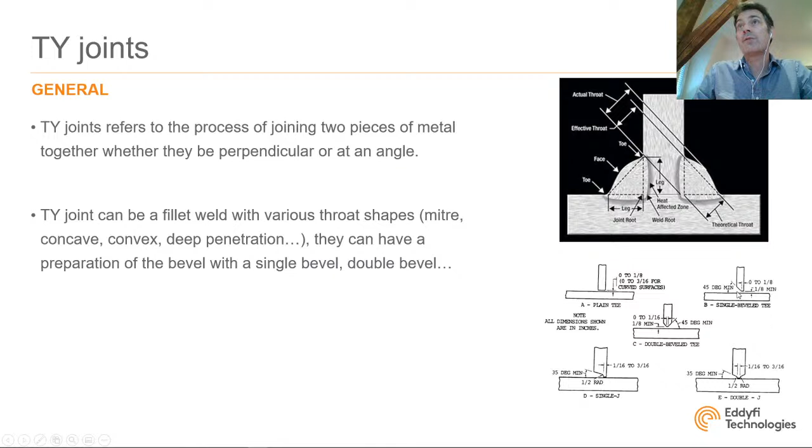And you have a big variety of shapes. You can have a plain T, meaning without a preparation, so we'll have one example of that. You can also have a single bevel, double bevel, or other type of preparation. If you look at the international standards, ISO, ASME, and others, they provide guidelines on how to inspect this type of welds with conventional UT or phased array. Today we will be focusing mainly on phased array.

So ideally, to inspect a T joint, here's the T, here is the base plate. The best location is actually on the plate opposite the web, here, because you have direct access to the two welds, and you can just do a regular linear scan, or if you do conventional, just use a regular L0 probe to inspect this fusion face right here. You can complement that with two sectoral scans to be normal to the other fusion face when you have a prep.

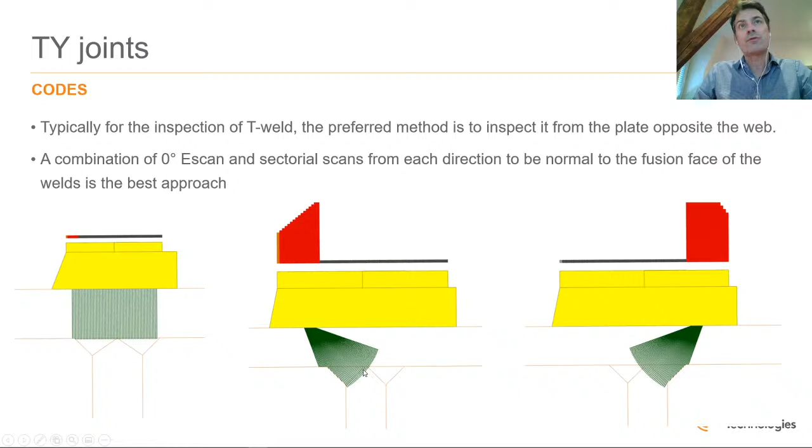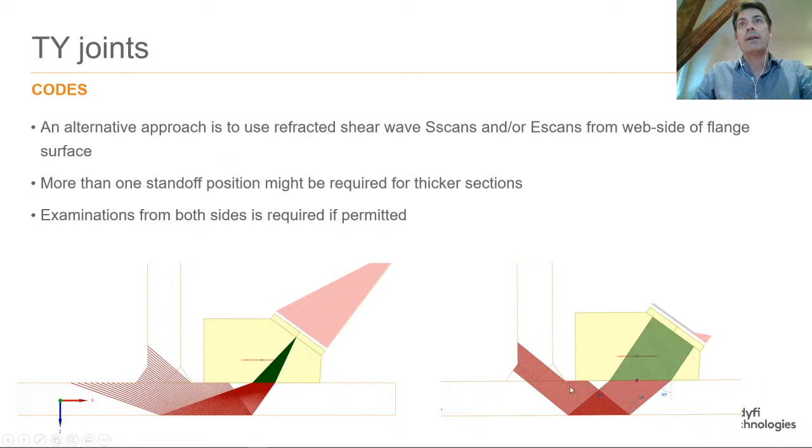Sometimes you don't have access to that surface, so as alternative approaches, you can put the probe on the flange surface and perform a sectoral scan and/or a linear scan. Of course, you have to do a scan plan and show that you are doing full coverage of the weld or welds, and as much as possible that you are normal to the bevels.

You can also inspect from the T, and that's the same. You have to do a scan plan to show that you are covering your weld. So here with the high angles, you can inspect this bevel, and with the low angle after rebound, you can inspect this bevel with either a sectoral scan or linear scan.

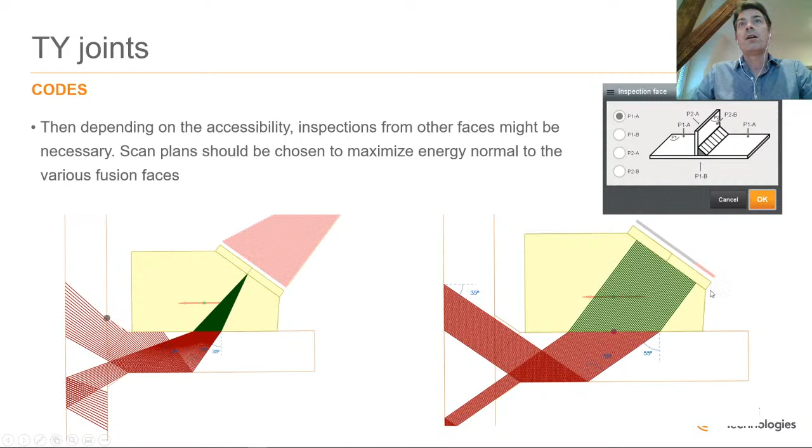So for my demo today, I will be using two blocks. One is a T, or what's left of it, with a very thick base plate of 40 millimeters and a T of 12.5 millimeters. There is no prep, so there is no fusion between the T and the base plate. It has two fillet welds. And actually, that sample has some fatigue cracks right here, and that's why they cut it.

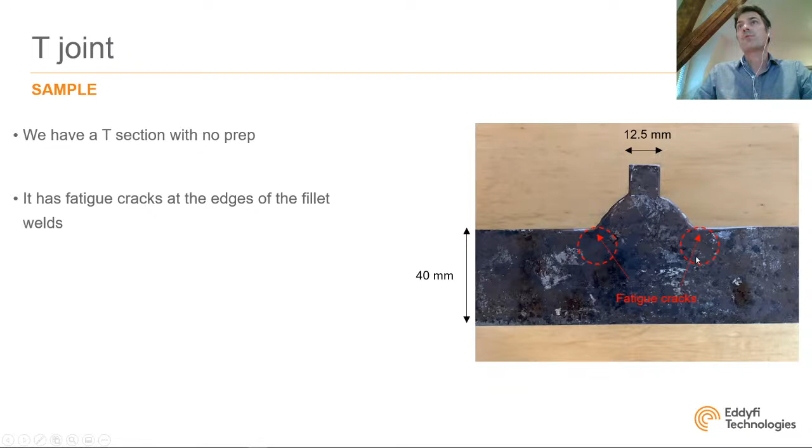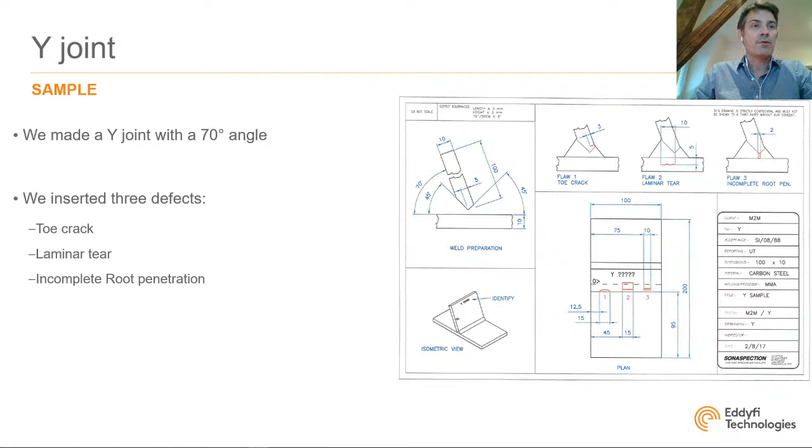My second sample is a Y joint that was made by our friends from Sonaspection. We asked them to put in three defects. So there is a toe crack right here, a lamellar tear, and an incomplete root penetration. Okay, so now let's go into the demo.

So here I'm sharing my webcam, and you can see the sample that I will be using first. And here I'm connected to my Gekko through Wi-Fi, and you can see the screen of my Gekko right here. So the first example is the T section, the one I was showing at the beginning, and I'm going to show how to define that component in Capture. First I imported a picture of it. You can simply import pictures by clicking here.

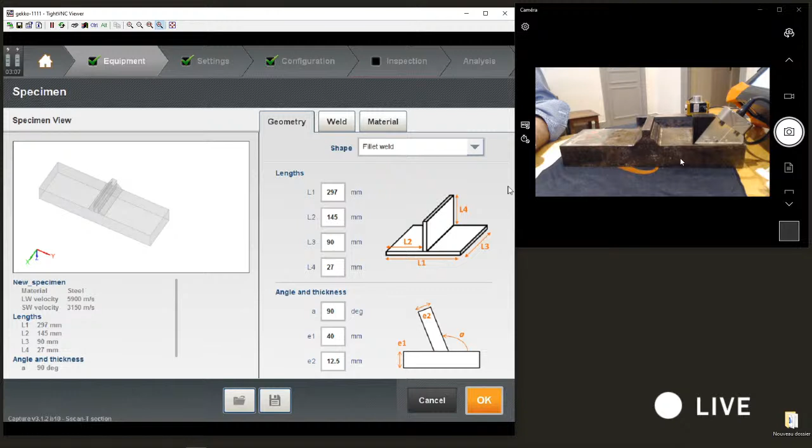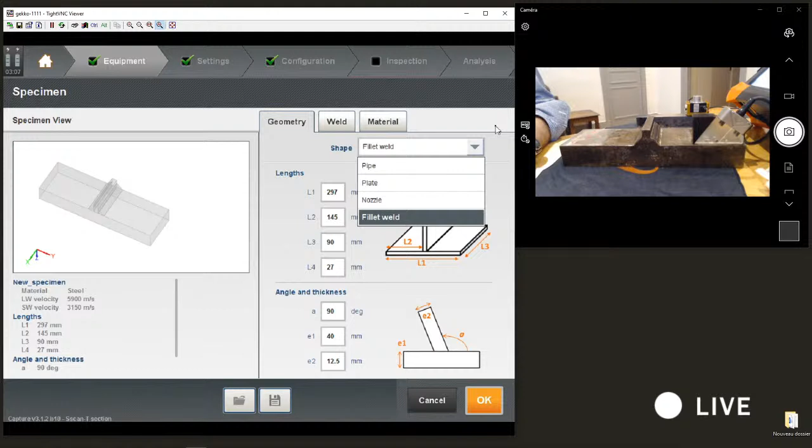So in Capture, you can see here the 3D of my component. At the moment, we can handle 4 different parts. We can do plates, pipes, nozzles, which will be covered, I think, next week by my colleague Dean Mason in another coffee break, and fillet welds. We can also import 2D CAD files as overlays. We'll talk about that in another coffee break as well.

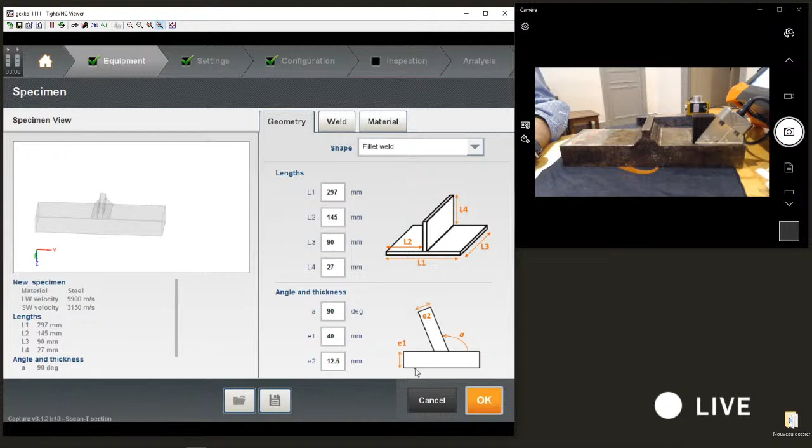So the fillet weld is actually pretty easy to define. This is a parametric definition. You have a drawing here with all the different lengths, and you just have to input all the values. And here for the angle and thicknesses, the thickness of the base plate is 40 millimeters, and the thickness of the T is 12.5 millimeters. We have a 90-degree one.

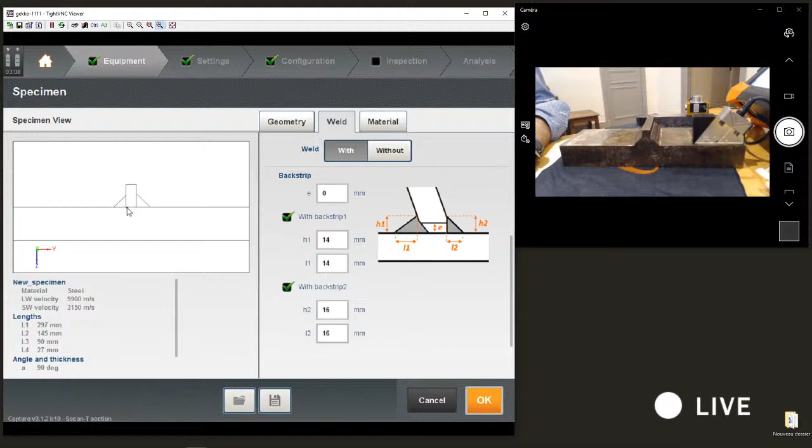Then you can define the weld. So here we don't have any prep, so I'm not using any chamfers right now. I will show that later with the Y joint. So the only thing we have to define are what we call the back strip, or they're also called legs, which is basically that length and that length. So I can remove them, for example, if I have a fillet weld on only one side, or I can add them, and I'm just going to adjust the length.

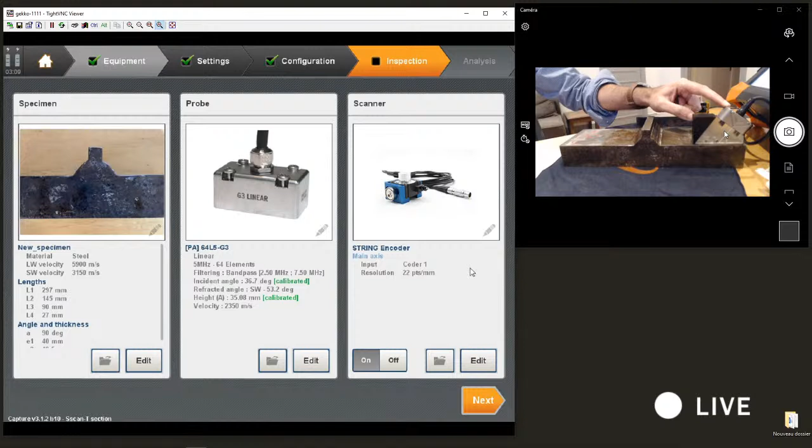Okay. This is just carbon steel, so I'm just going to use carbon steel. For the probe, I'm just going to use a regular 64 element 5 MHz G3, which is a 0.6 millimeter pitch, very typical for 5 meg. I'm going to use a shear 55 wedge. You can see that it's already calibrated, but for those who haven't seen the calibration, I'm just going to do it. It's under reference, angle and height calibration.

So what we are doing right now, we are firing all the elements one by one. So this is element 1, this is element 64, and what you are seeing right here is the back wall. As I move, you can see the back of my wedge. So I just have to adjust my gate right here to make sure I see all the back wall. Press measure, and you can see a white line right here. So that's a linear fit to measure the angle of the wedge and the height of the wedge. So this is the wedge delay calibration. You don't have to do anything else.

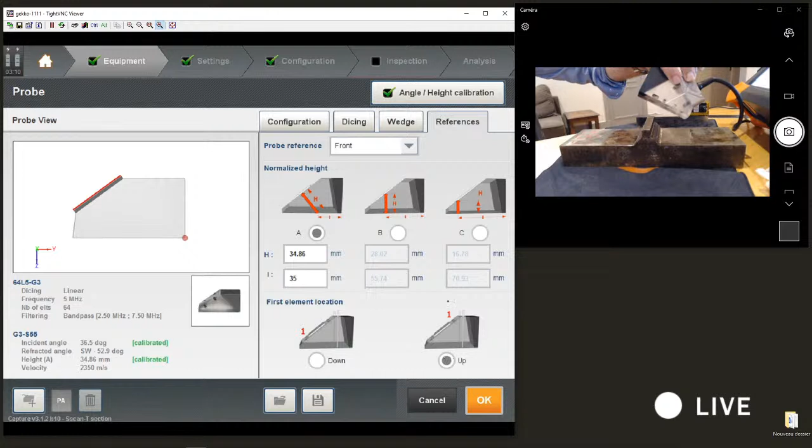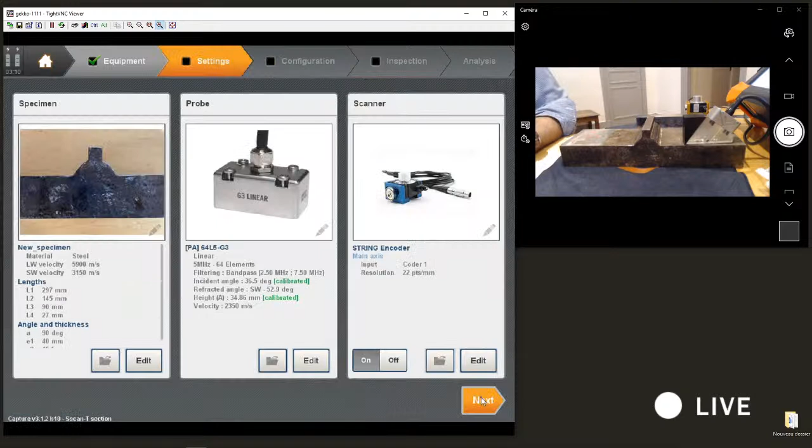Here you can see that my first element is positioned right here. It's down, but the system also checks automatically if you misposition the element. So let's say I'm going to tell him my first element is up. If I redo my calibration, you can see here that it's putting back my first element at the right location. Okay. I'm going to use a wire encoder, a string encoder right here.

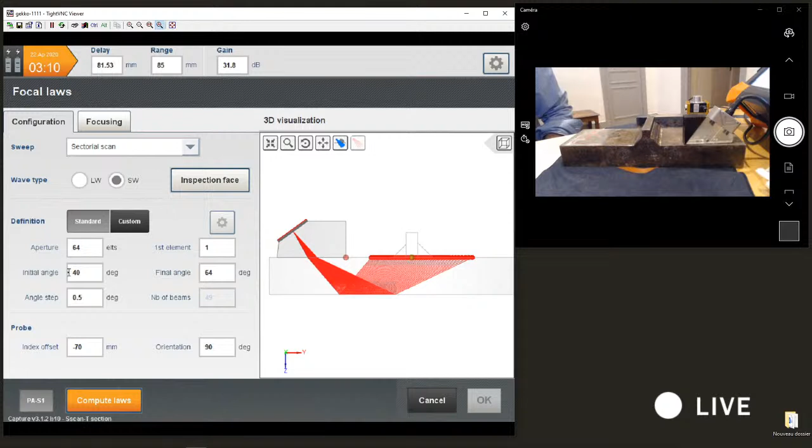Okay, so let's go to the delay laws now. We are going to put the probe where it's located right now, on that surface. And here we're going to use a full 64 element, and we are going to do a sectoral scan. Using the wheel of the screen, I can adjust. I use 0.5 degree. I can adjust here the coverage. So I just want to make sure I'm fully covering my weld. So the low angle after reflection, I'm going to inspect that side, and the high angle right here.

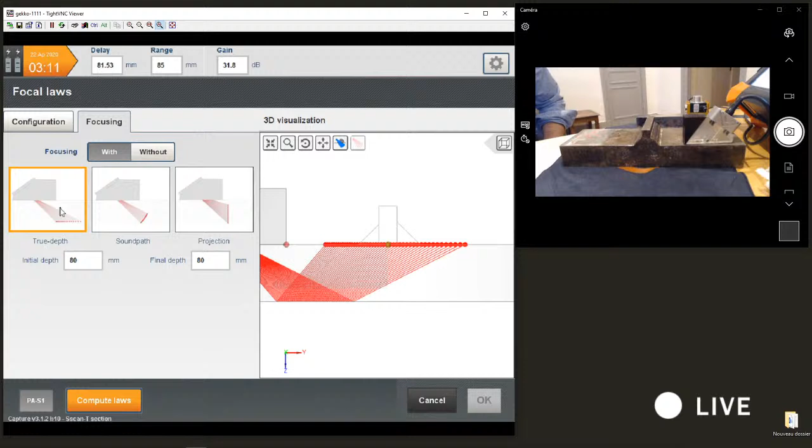For focusing, you can see the focal point right here. Focusing at 80 millimeter true depth. So 80 millimeter, which is 2 times the thickness of the base plate, because I'm looking for any defect right here. Compute the delay laws, and I have a live signal of what's happening. So I can actually adjust my delay laws if I'm not satisfied with the result.

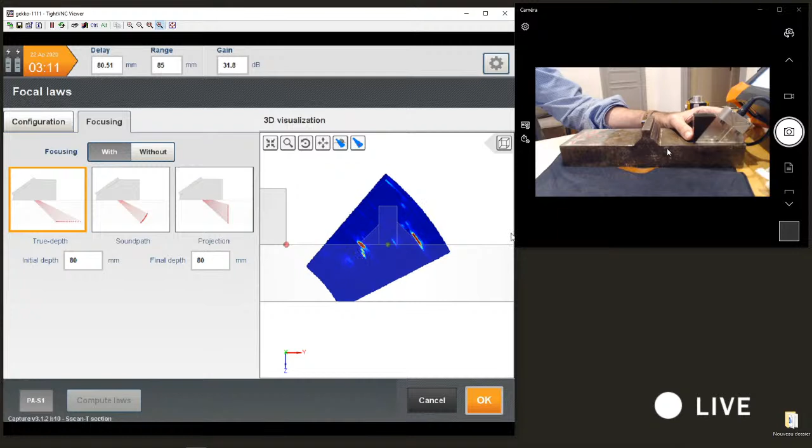So what do we see right here? We see several echoes. We see a very strong echo right here, which is actually a geometry echo coming from the back of the weld. So actually from that weld right here, you can see it's actually round. We can see a small weak echo right here. So remember, there is no prep. So there is a weld right here. There is a fillet weld. So this is an echo we are getting at the interface, which is not welded. And on that side, we have a corner echo, and you can see some tip diffractions. So we actually have one of the fatigue cracks that initiated on that mockup.

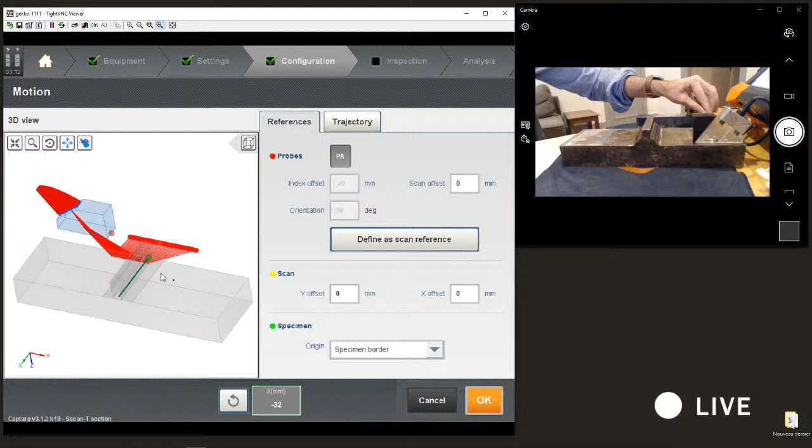So for the gates, I'm just going to do a regular gate sound path. I'm just going to acquire all the data. For the scan, as I mentioned, I'm going to use my string encoder. So you see, as I move, you can see the probe moving in the 3D of the component.

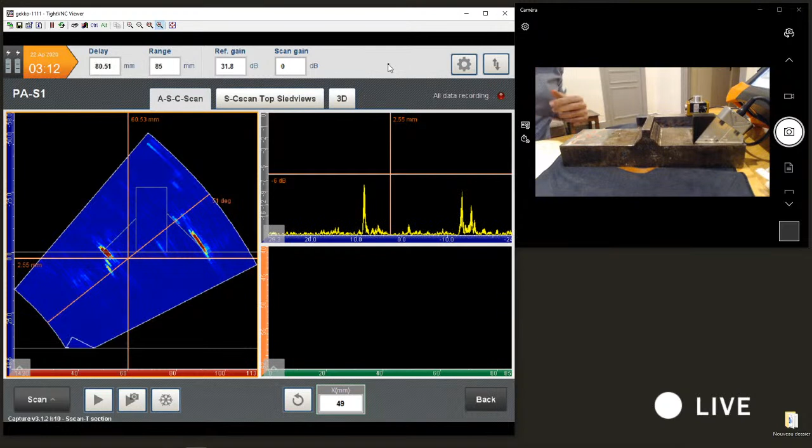All right, so let's go to the acquisition. I'm going to try to do a good job. Just going to use my encoder right here, and I'm going to try to move as straight as possible. Okay.

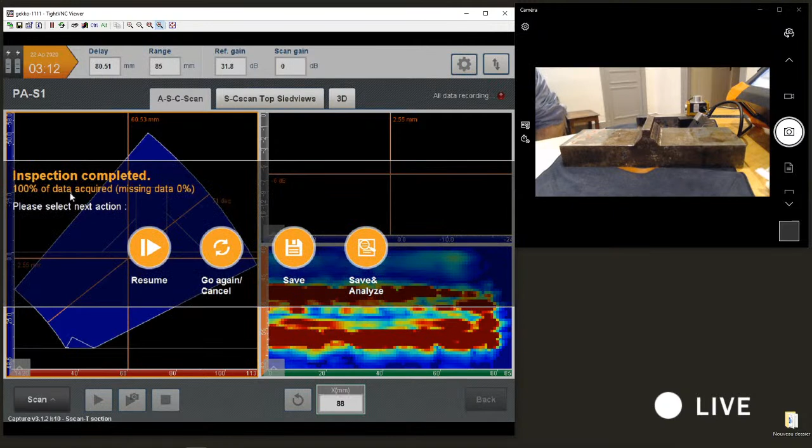Okay. I can see I acquired 100% of my data. I didn't miss any frames. I can save the data and analyze. Just going to give a standard name. Okay. So here we have our sectoral scan, A-scan, C-scan.

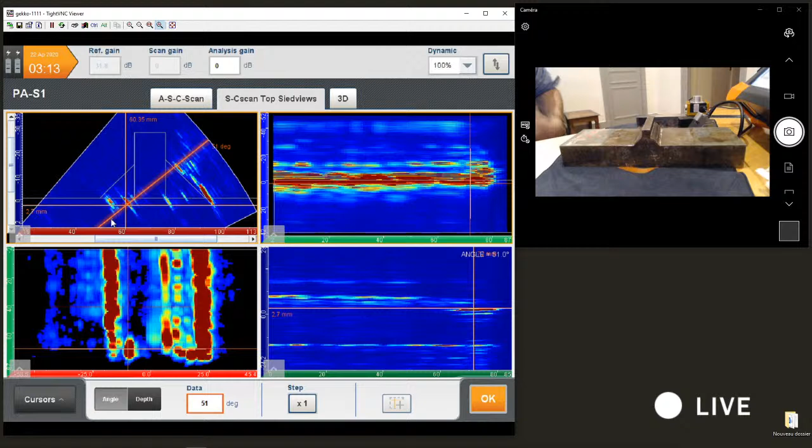So right now we have here a D-scan. We have our top view. So you can see here that echo from the weld along our scan. So this is my echo. Here this is the echo from the back of the second fillet weld. Actually here we have side drilled holes on the other side. There is one here and there is another one right here.

And we also have a 3D view. We talked about it a little bit in the first coffee break that we did about the analysis tool. So that's a new tool in Capture 3.1. You can actually export all the data in a 3D view. So that's actually pretty cool because you can see the echo being superimposed with the 3D.

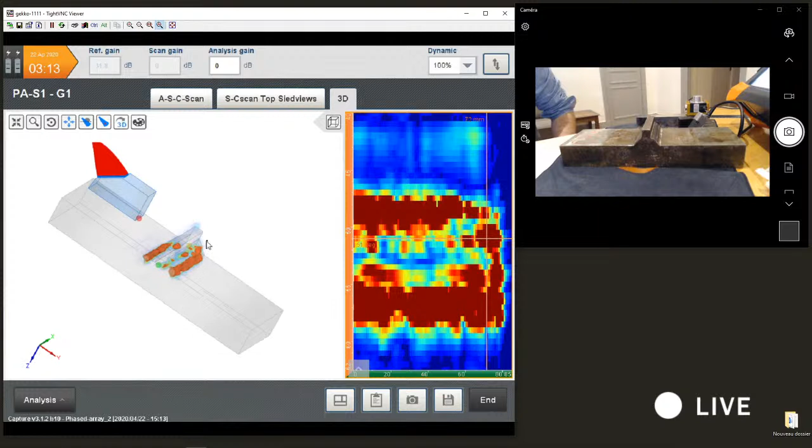So here this is the echo from the back of my weld. So from that one, this is my defect. Actually, I'm not very good at moving in 3D. This is my side drilled hole and so on.

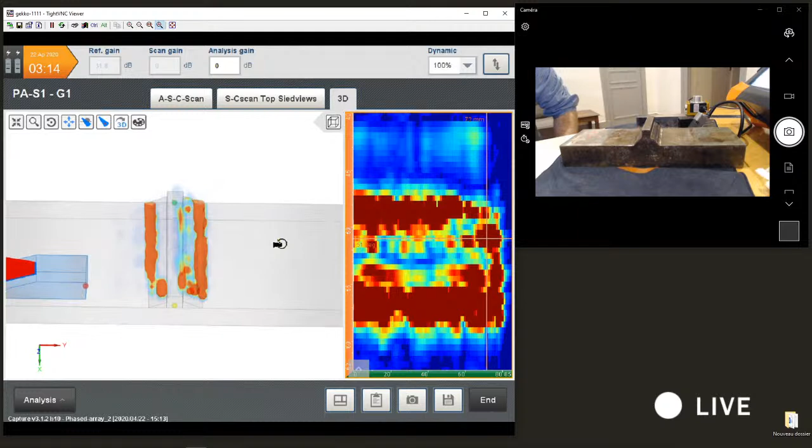Okay, so a cool thing about that sample, so I'm going to try to move my webcam and hopefully it's gonna focus a little bit. I don't know if we're going to be able to do it. Okay, here you go. You can see some notches that we have on the other side.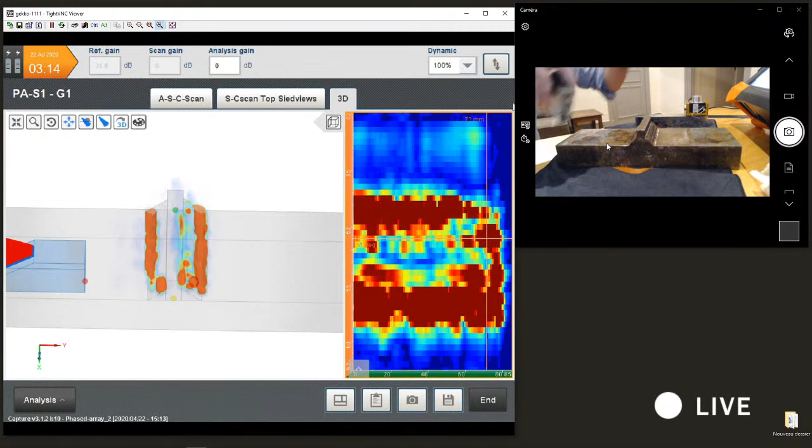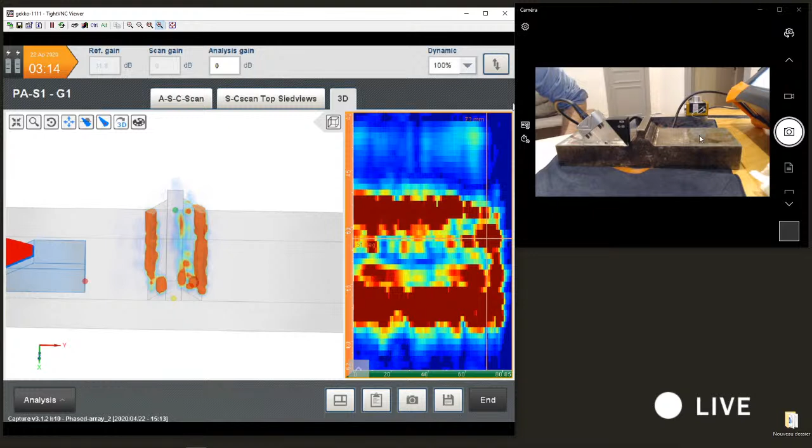So something I'm going to do here, I'm going to try to inspect those notches from the other side. Kind of a similar inspection to the annular plate of an above ground tank, sorry. I'm just going to put my probe here and I'm going to try to look for this defect after a skip to go underneath the fillet weld. So for that I'm going to change my scan plan.

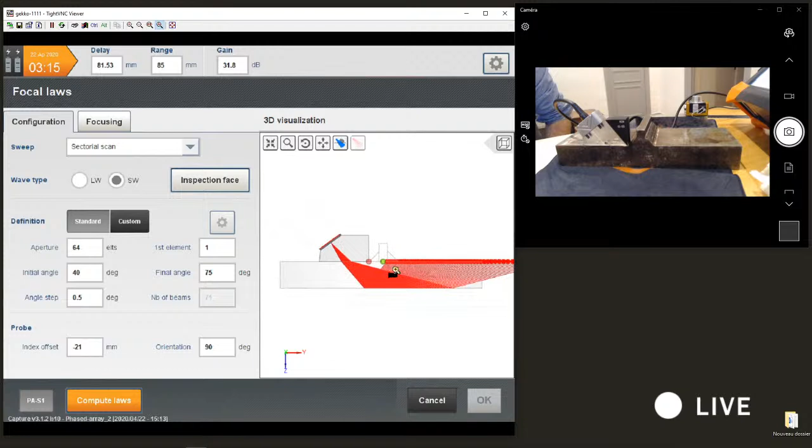I'm going to put my probe against my fillet weld, so I know the value, and I'm going to extend a little bit my scan, let's say about 75 degrees. So you see here, now I can actually cover a pretty wide range, and you can imagine I could be looking for corrosion or any defect that you would be having on the surface. Okay, I'm going to extend my range a little bit.

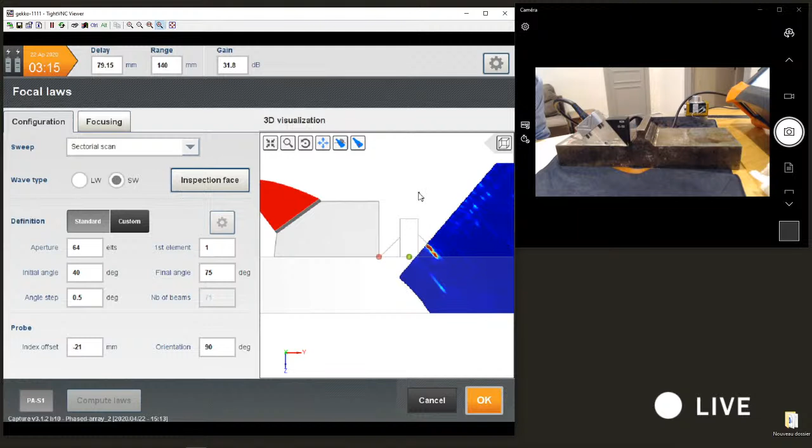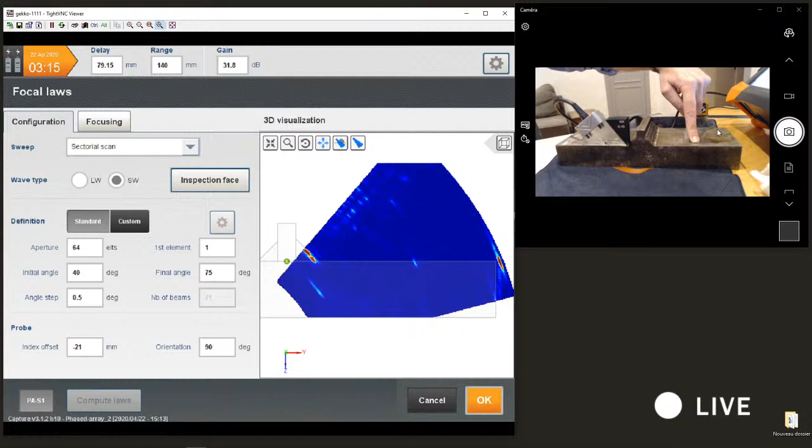So what we see right here, we see the echo from the back of our weld, we see the echo from the back right here of our sample, and we see here our notches. So it's interesting, very similar again to an annular plate inspection. Obviously the base plate here is much thicker, but you can actually use the fillet weld part to calculate delay laws and go underneath the TKY joints.

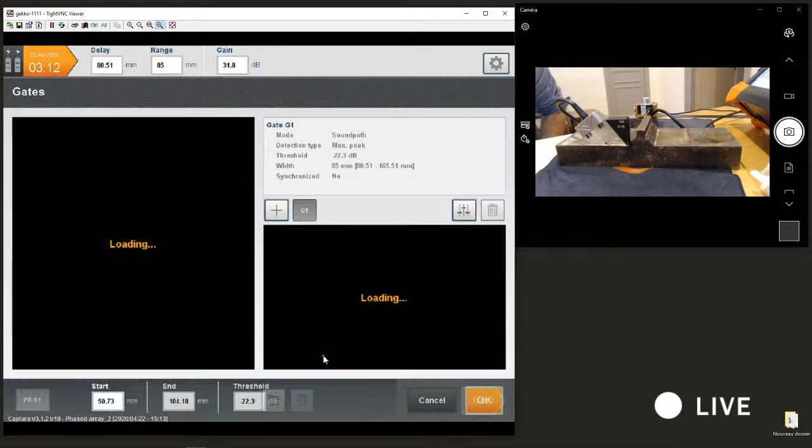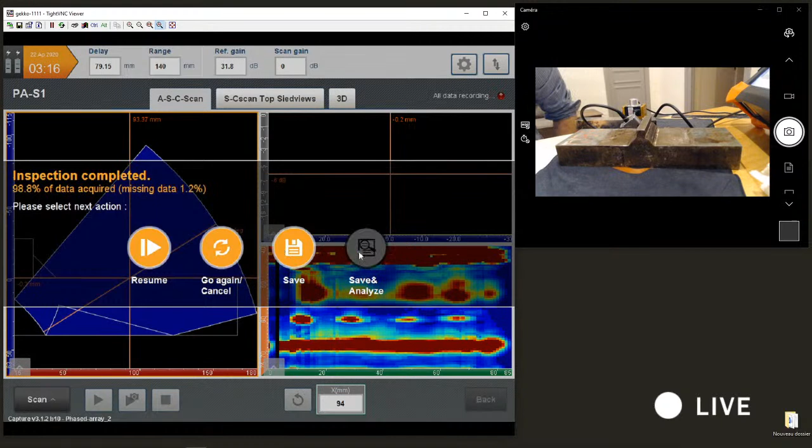So I'm just going to do an inspection again. I'm going to extend my gate to make sure I acquire all the data. Okay. Again, I'm going to try to do a scan. A little bit of water. Here we go. I'm going to save the data. You can see I missed some frames here at the beginning. I kind of didn't play very well with the probe.

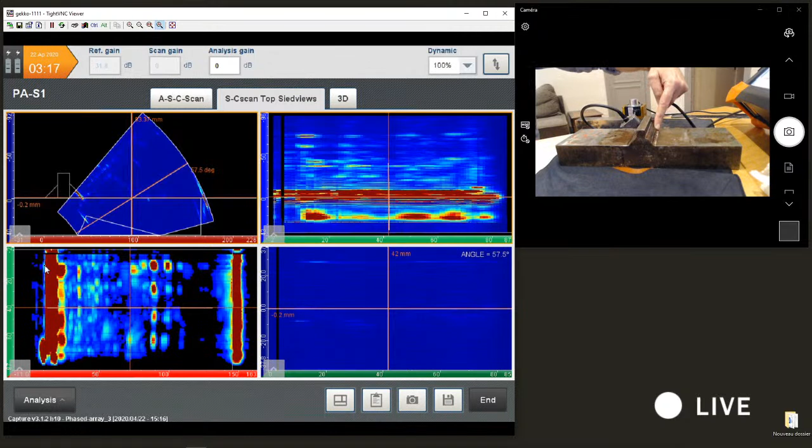Alright, so we see our 4 notches I showed you before on our C-scan. 1, 2, 3, 4. But it's actually interesting to look at the top view. Okay, so on the top view you can see the plate right here. And you can see the very strong echo right here. That's actually the echo coming from that side. That strong echo right here, it's coming from this fillet weld. And here you can see the 4 notches, 1, 2, 3, 4.

So we can actually also look at the 3D if we want to. So the 3D, you can see my 4 notches right here. I'm going to remove the 3D export. You can also look at a cross section right here. So for example, if I move on my 3D, you can see your defect in the 3D view, looking at the sectoral scan.

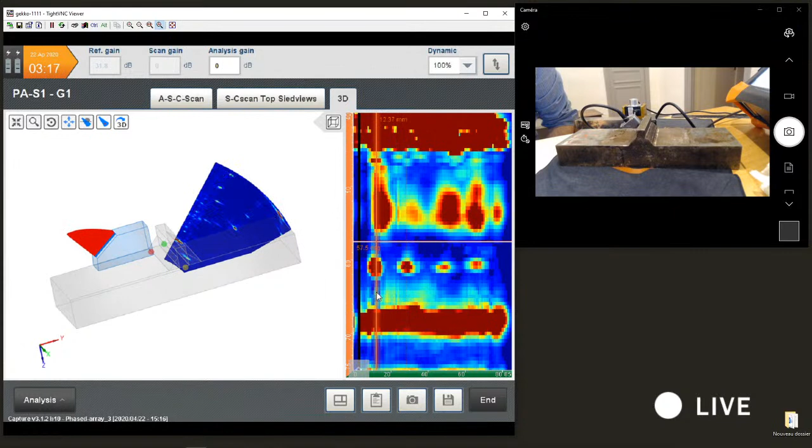I'm going to use the analysis feature I showed in the first coffee break. So this is an auto sizing feature. So I would encourage you to go back to the first coffee break or look at the blog on our website. I'm going to use the auto sizing feature to size automatically my indication at -6 dB. Obviously I can change those values, so I'm just going to basically look around my defects. I'm just going to put one around every single defect.

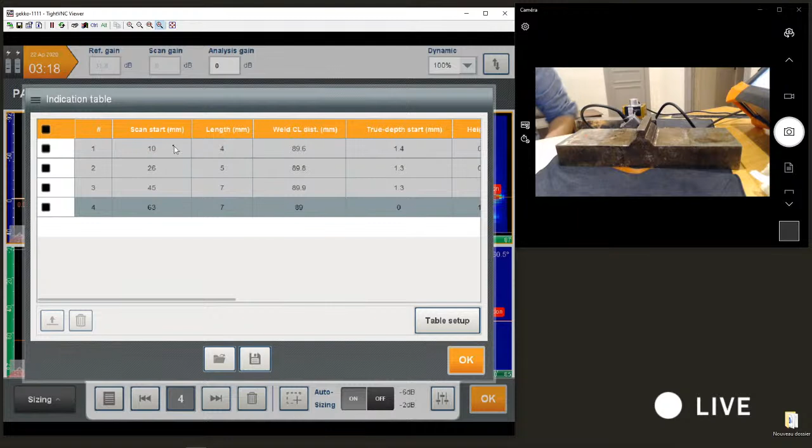And you see I have quickly done an analysis. I can see my 4 indications right here in my top view, side view, and so on. And they have been added to my table of indications. I'm just going to display scan start, the length, the distance to the weld center line, true depth, the height, angle, and so on. So all the information necessary for me to see if I'm going to reject or accept those defects. All right.

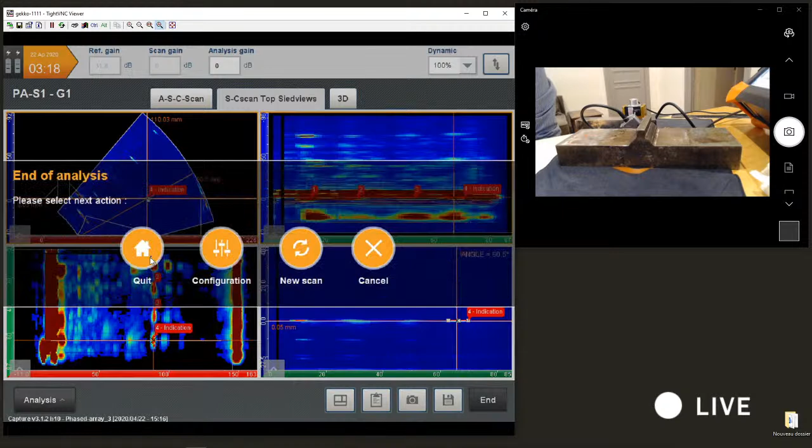Okay, so that's it for the T section. I'm going to switch to the Y joint. A little bit of logistics right here. So this is going to be the Y joint.

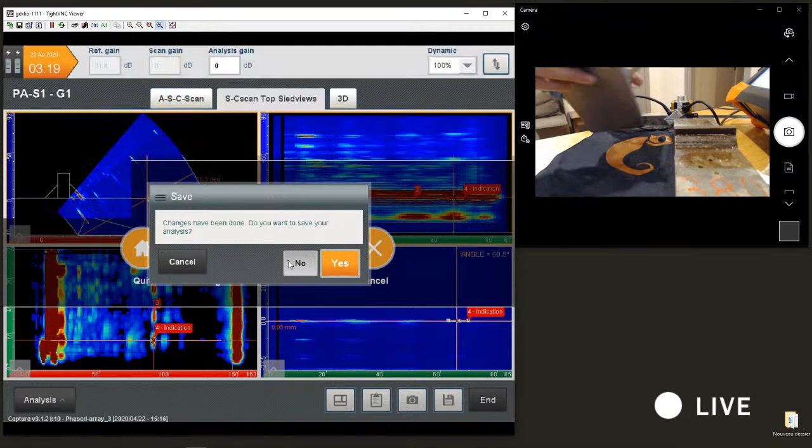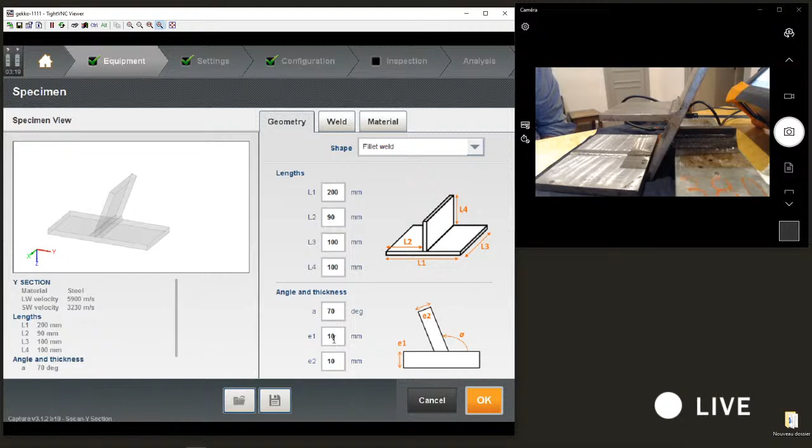I'm going to play Lego a little bit here. Okay. So the Y joint. Okay, so you can see here I already predefined it. My base plate and my T have 10mm thickness, and I have 70 degrees. So I have 70 degrees here between my 2 plates.

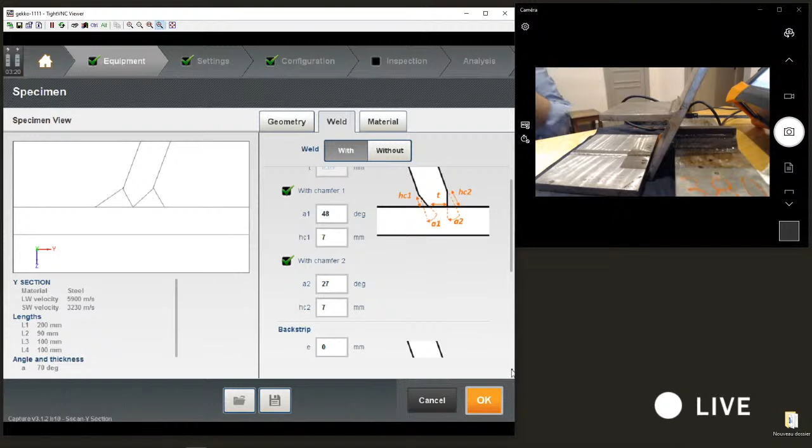And I actually have a prep here. I have a double prep. I have a bevel on either side. So that's why I actually added my chamfer, chamfer 1 and chamfer 2, with the angle and the height. So you have here the indications. So you can actually adjust when you have one bevel. Obviously, I will remove that and have a much larger angle. I'm going to keep the same probe, same scanner.

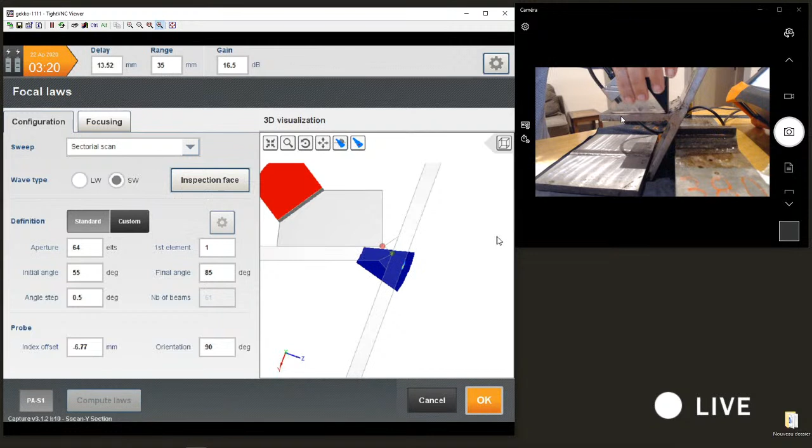Okay, and I'm going to explain a little bit something I didn't explain before. So here we're going to put the probe on that surface. Add a little bit of water. There is this button right here that you have access to when you are dealing with fillet welds that allows you to position your probe on any surface. So obviously the P1B will be the favored one if you have access to that surface. But here we're going to put the probe on the P2A and look at something a little bit interesting.

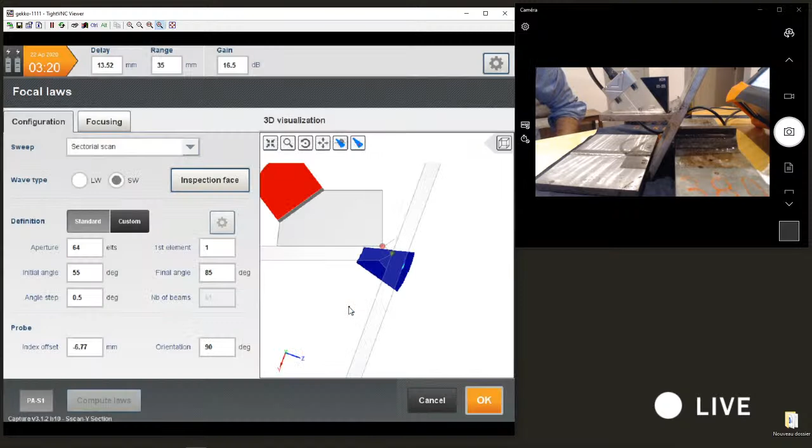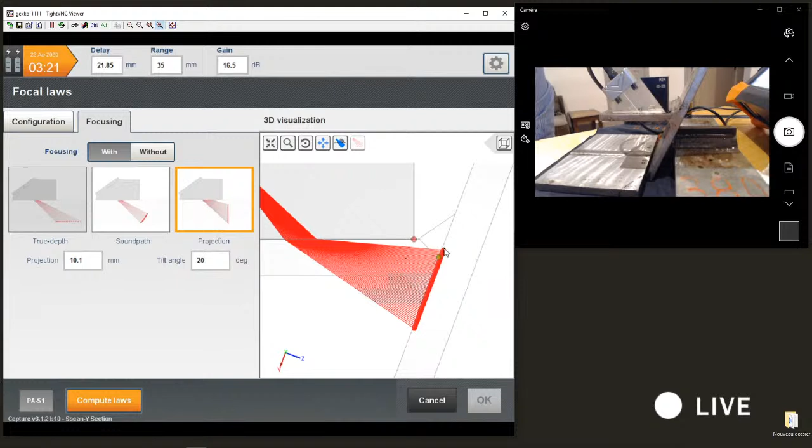Regarding the delay laws, we are doing a sectorial scan, again, 55 to 85 degrees. I know 85 is a little bit high, and I'm not generating this 85 degree. But I'm using a projection focusing. So projection is focusing along a line, and you can see here my line is at 20 degrees. So I can change that, but 20 degrees is the angle I need to put to be parallel to the base plate. I can also change my projection.

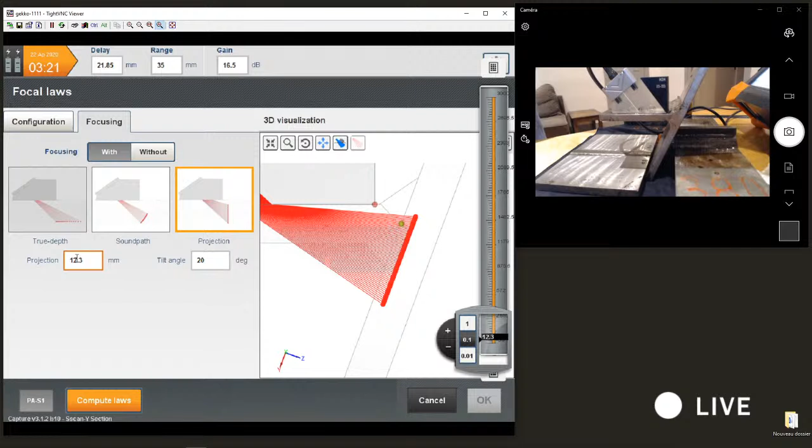Again, I'm just going to move here. So you see I can easily, with the wheel of the Gekko, change where I'm focusing the energy. So as I'm using 64 elements, I'm going to focus right here and will be very sensitive to tip diffraction, if any. Here you can see, if I stop moving, that I have an echo right now, and that echo is aligned with the back of my plate. So this is just a simple backwall echo from the base plate. With the overlay of the part, it's pretty easy to interpret that echo.

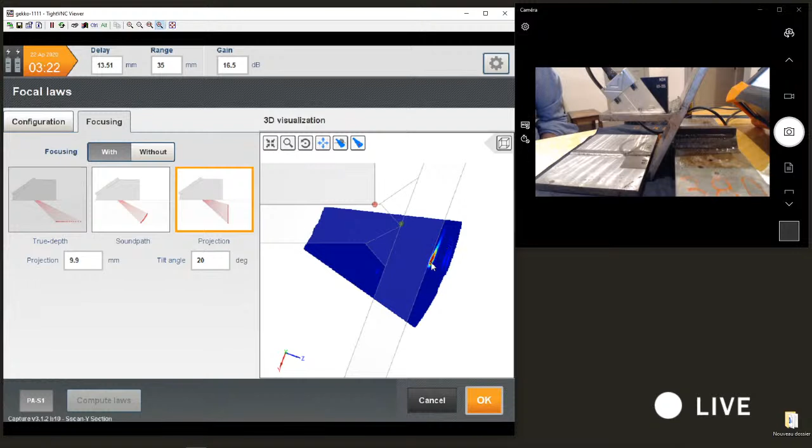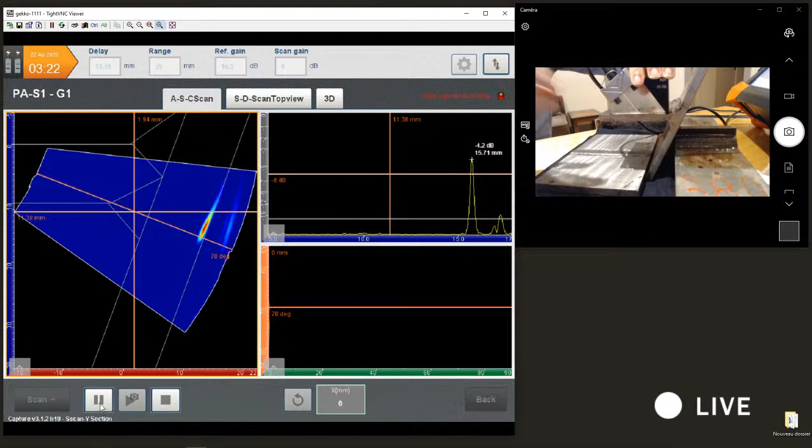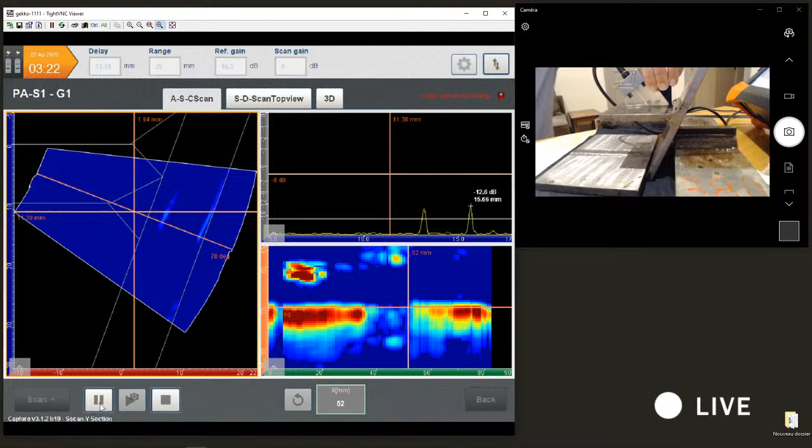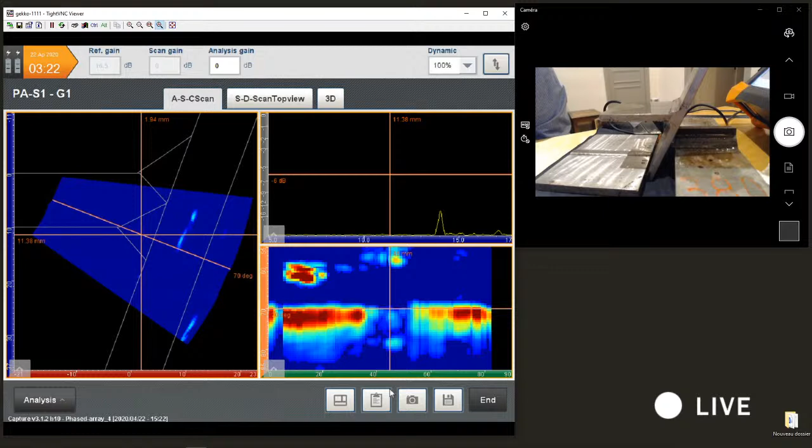All right, so let's go into the inspection. Again, I'm going to try to do a good job inspecting the part. I'm going to use an envelope for the signal. Alright, so this one is actually not that easy, so I'm hoping that I'm going to do a good job. It's actually not that great. Alright, let's stop right here. Save and analyze. Okay. And I'm going to bring the drawings of the mockups to try to explain the different defects that we have.

So let's look first at that defect right in the middle. Well, first, let's go back to where we don't have any defects. So when we don't have any defects, we have nothing here. We just have our backwall echo coming from the base plate. So here, this is our lamellar tear that you see right here. We can see that we have a direct echo of the lamellar tear. If we use two cursors, I could actually size the height of the defect. So this one is actually pretty easy. As you move, it disappears, and I get my backwall echo again.

We have a very strong echo right here. So we still have our backwall echo right here. So that means there is no defect here hiding my backwall echo. And the defect right here seems to be outside of my part, which obviously is not possible. So I'm going to recreate my sectorial scan using the skip. So I'm folding my sectorial scan, and you can see that my defect right now is well positioned.

This is my toe crack that you see right here. Remember, my probe is right here. So I have a skip right here, and I can reposition correctly my toe crack, and actually I could size as well the height of my crack right now. So that's pretty neat. And it's hard to see because it's a very small defect. So I'm going to add a little bit of soft gain right here.

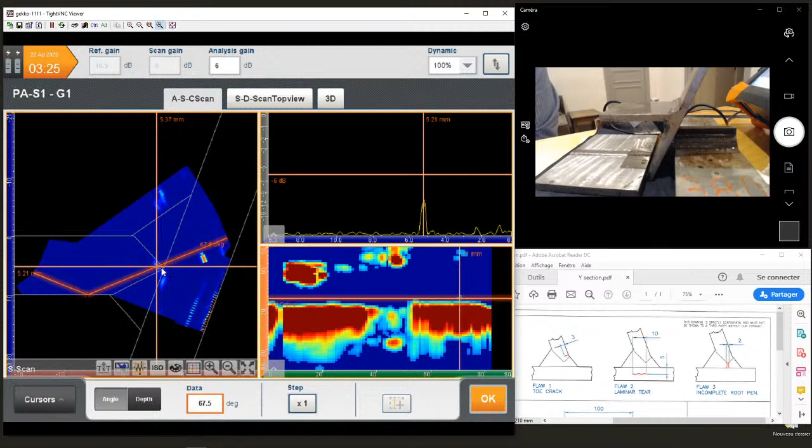So I can actually look at the same defect, and you can see it's located at the same location. And I have another one. I have another echo. So that echo right here is actually coming from two skips. So 1, 2, and 3. You can see here my echo is, everything is coming from the same location.

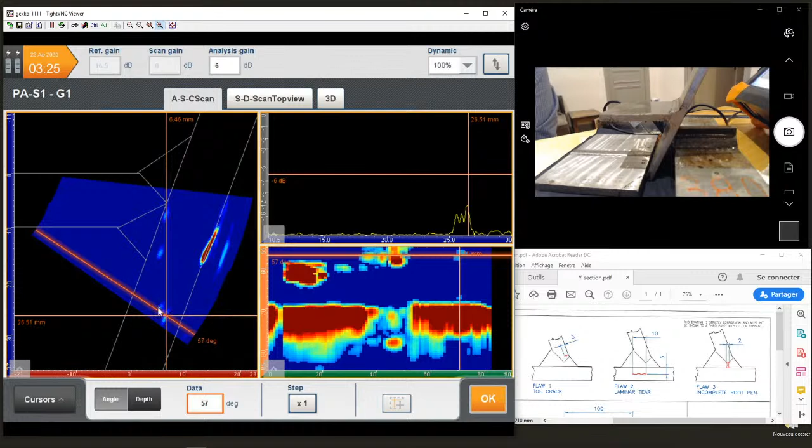So really being able to fold your sectoral scan many times and rebound off the different surfaces helps the operator interpret the data. So if I go back to the direct, you see that was that echo that I had at the beginning. So the 3 echoes here are actually coming from the same defect. So those were my top views and D-scan. Same thing here. If I want to export in 3D, I can also export in 3D as before.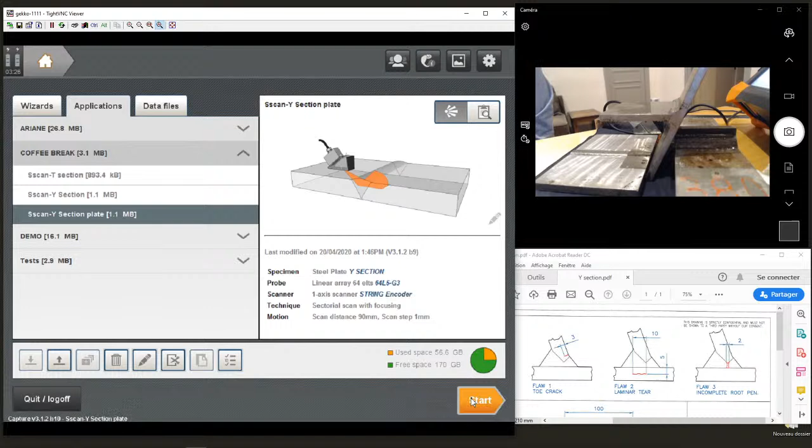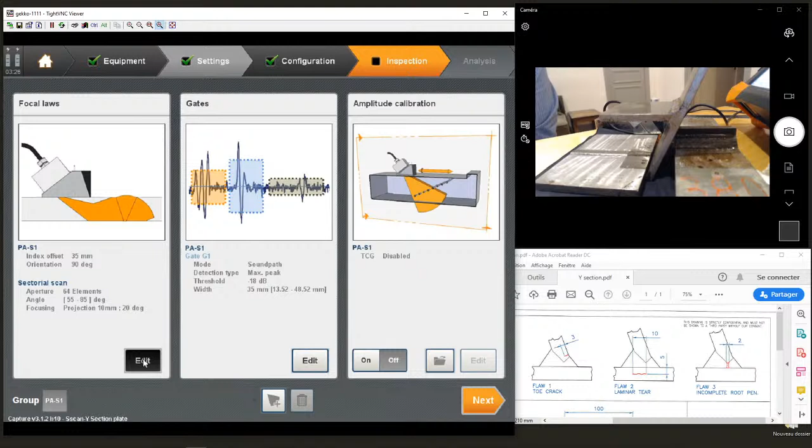Just want to do an acquisition right now. Same acquisition, but without the overlay, just to give you an idea of what you would obtain if you only were able to define the plate. So I'm just using the standard plate with a 10mm one. Same sectoral scan. I'm not going to change my scan. Still going to do my 55 to 85. Focus at 10mm and 20 degree. Okay, so I'm going to try to do a better job this time in doing the inspection.

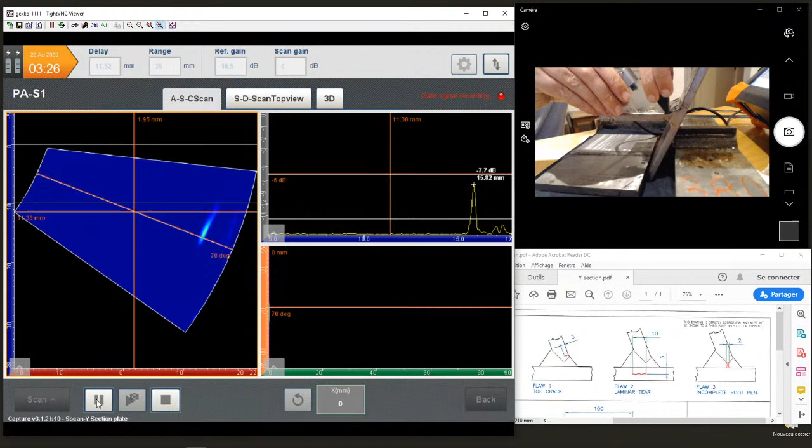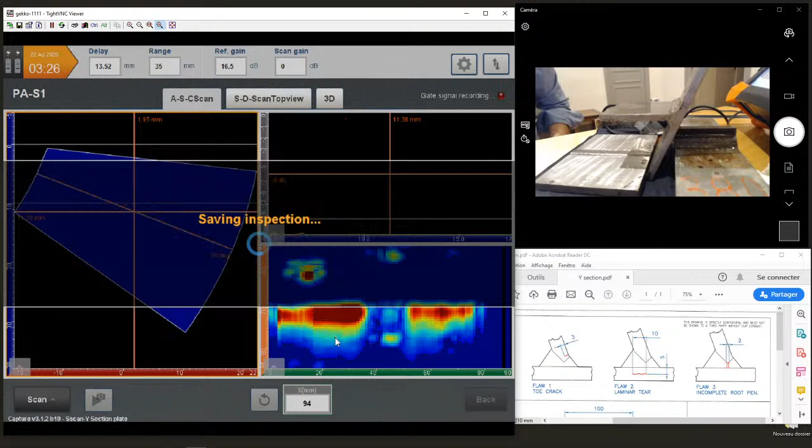And I'm going to do exactly the same scan. All right. Okay. So now I'm going to try to do the same analysis without the overlay. You're going to see it's a little bit more complicated. So I can see I have exactly the same scan. I have an echo right here, I have an echo right here. I can see that I have a constant echo, so I would assume that this is probably coming from my backwall.

But that echo right here would be a little bit more difficult to interpret because now I cannot skip and I cannot superimpose with the overlay of my part. Same thing here. I increase my soft gain again. I see I have different echoes, so potentially different defects, but without the overlay and without the possibility to skip over the different surfaces, it makes it a little bit difficult to try to interpret those echoes.

So really, the idea behind this fillet weld application is to help operators define their inspection, but also speed up their interpretation.